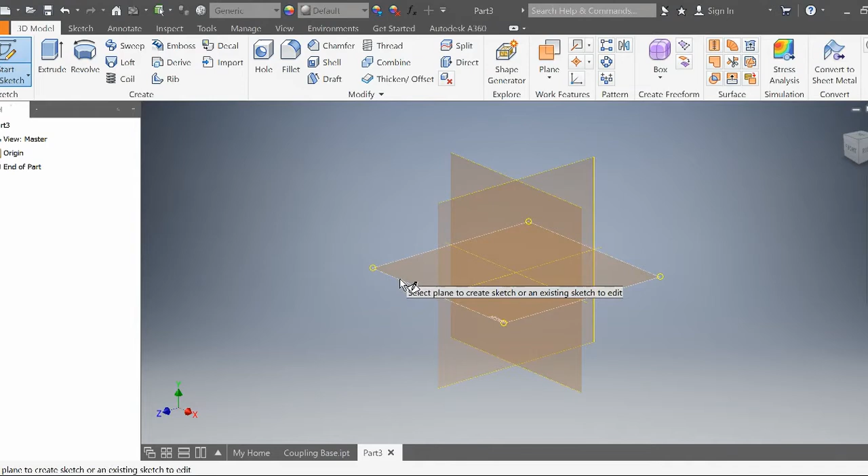First, we're going to draw a sketch on this horizontal plane. We're going to start by drawing 4 circles: 1 inch, 2 inches, and then another 2 circles on this side, so 1 inch, 2 inches.

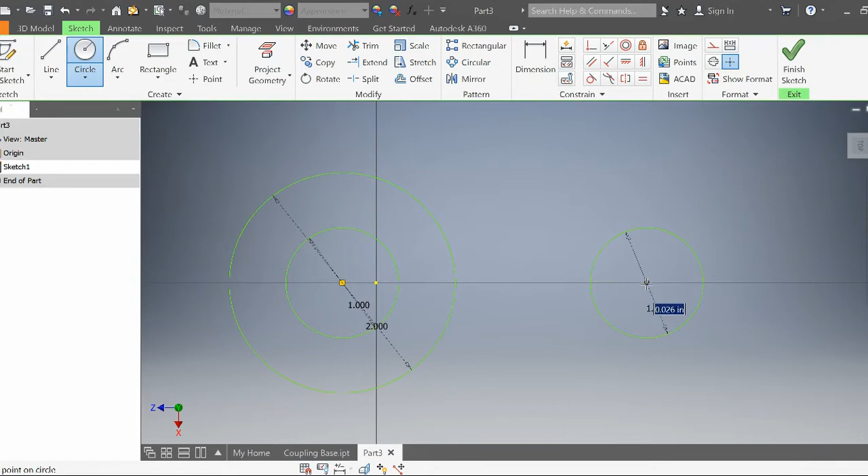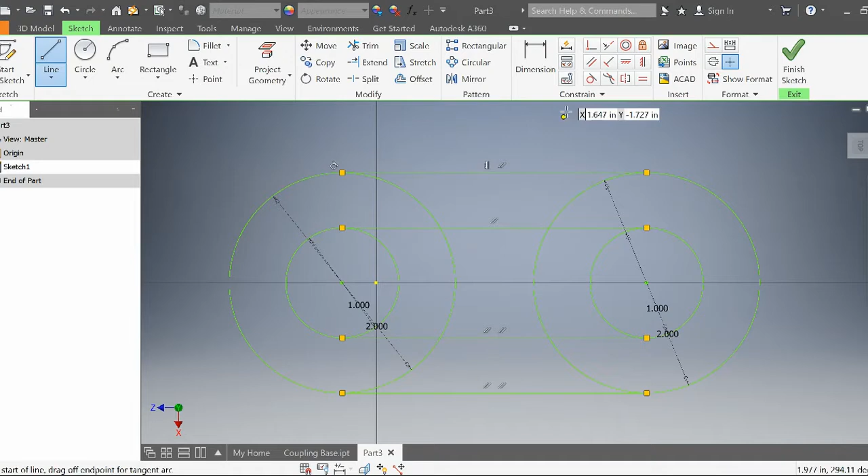We're then going to create tangent lines connecting these 2 circles, and then create tangent lines connecting the 2 smaller circles as well. Just to make sure that these are tangent, we're going to go to our constraints up here to tangent constraint. Click on the line, click on the circle. This little symbol will indicate that this constraint is a tangent constraint. Sometimes it already does it for you, so just a little message saying you've already constrained this. So everything here looks good.

Next thing we're going to do is the spacing between the 2 circles, center to center, is going to be 2.5.

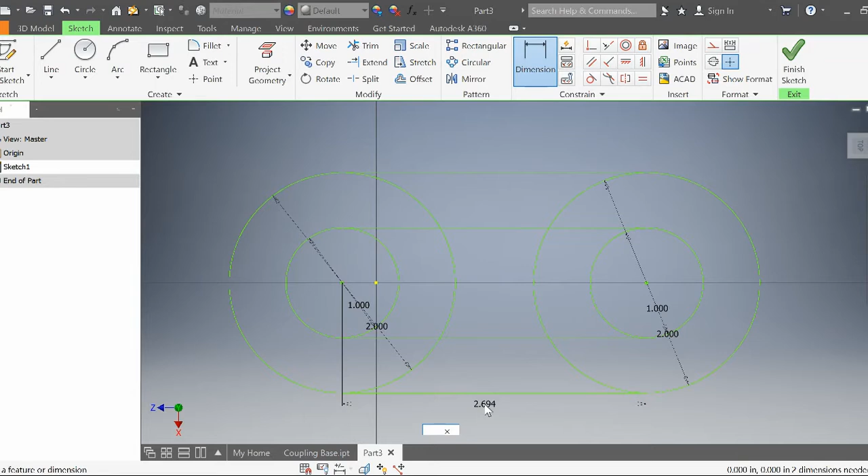We're then going to trim the interior part of the circle and just leave the half that's on the exterior for both circles, just like this.

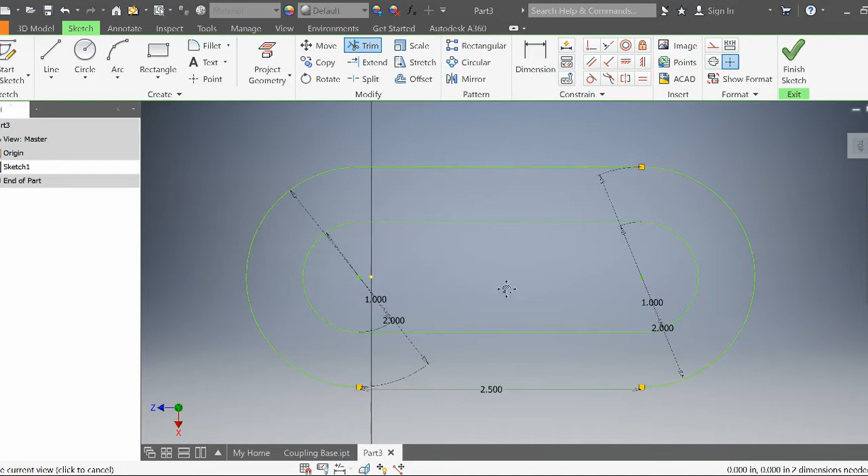And if we go back to our original drawing, you'll see there's a little gap right here, so that's the one we're going to build right now. We'll go to line and find the center of this line right here, so you see it turns green. And this is just a reference line, that's all this is.

Let me move this a little bit further down so it doesn't get in the way. I'm going to go 0.625 in one direction, and then I'm going to go across 1.25.

So I can even come in here and delete this original tiny line I drew there, and just leave the big one. I can get rid of this reference line.

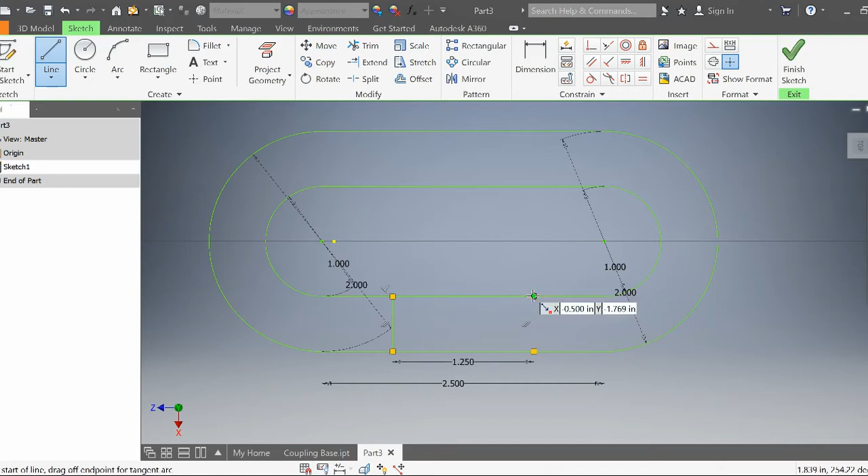Draw lines connecting that bottom line to this top line. And then I'm going to trim this portion of our shape. In this case, it says I can't delete it because I can't trim it, I have to delete it, there's a line on top of it. Now I can trim it.

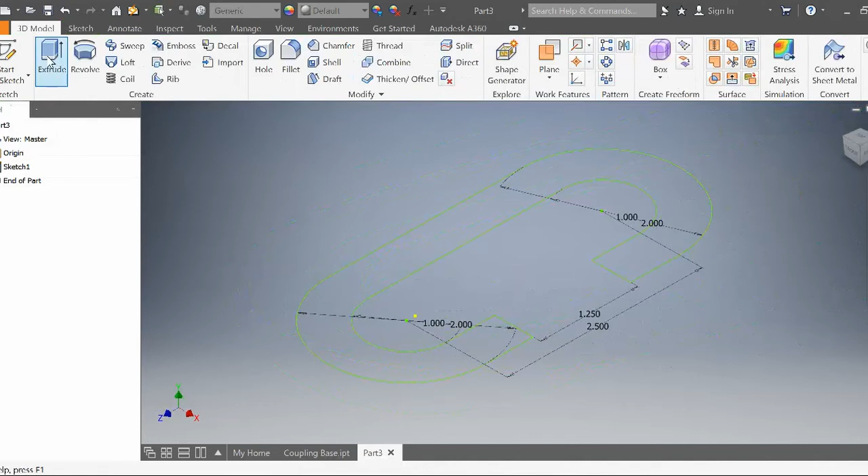Everything here looks good. Let's go ahead and finish our sketch, and then we can extrude this. We're going to extrude it at 0.5.

Now we're going to go and work on this portion of our shape. For that, we're going to start a 2D sketch and click on this face right here. And once again, we're going to create 2 circles. Let's find the center of this. There you go.

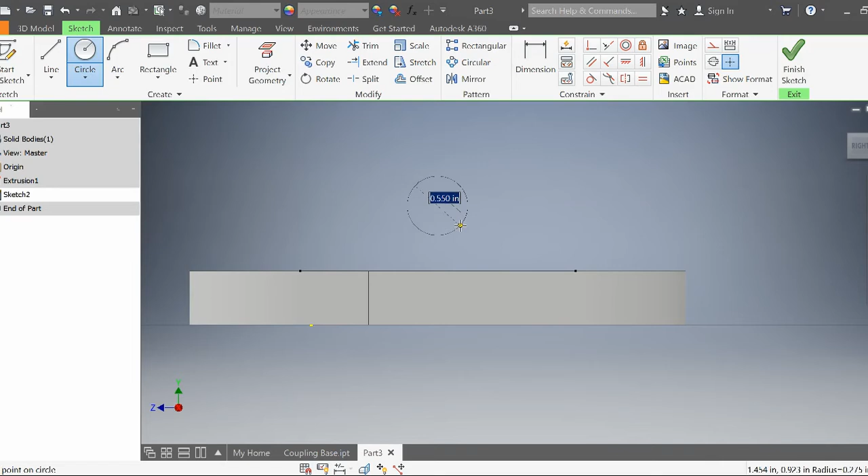First circle is going to be 0.5, second circle is going to be 1.25.

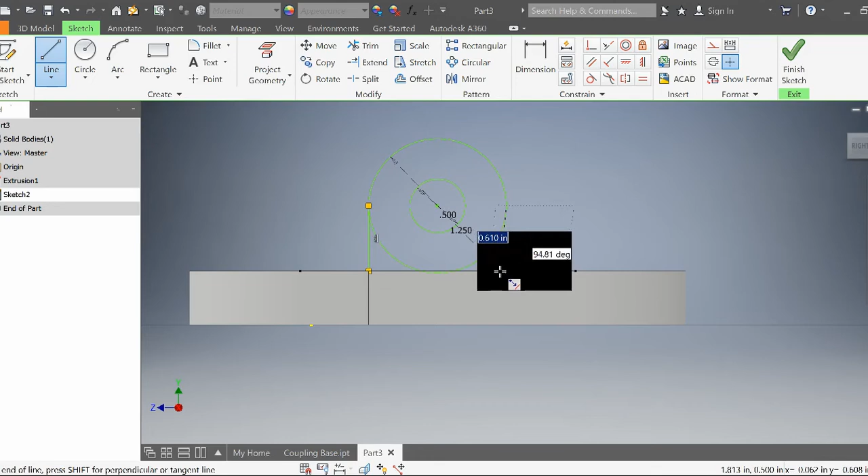And we're going to connect this circle to this horizontal line here, make sure it's a vertical line. And like before, we're going to make sure that these are tangent lines. Click on the circle, click on the line, click on the circle, and click on the line.

The dimension from the center of the circle to the bottom here is going to be 1 inch. Let's go ahead and make that 1 inch.

And just like before, we're going to use the trim tool to get rid of this part of the circle we don't need, only going to leave that.

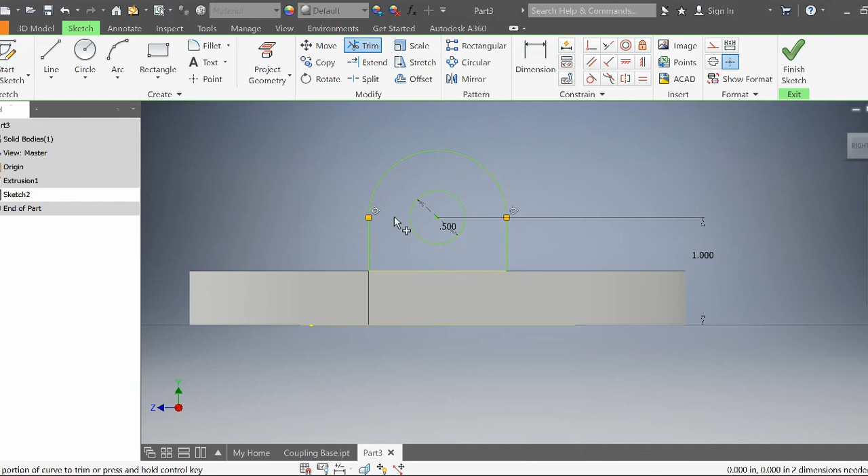Now we're going to extrude, and we're going to extrude in the opposite direction, 0.5 as well. Press OK. And here's our coupling base.

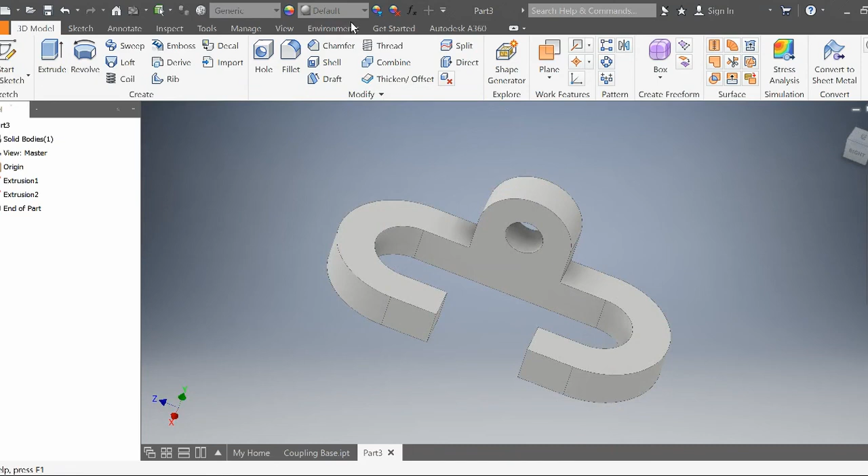If you want to change the color, you go up here where it says default. You can pick a glossy gold if you like.